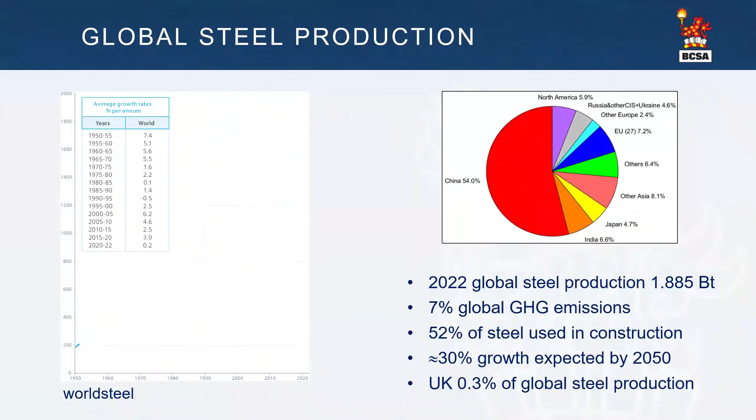Onto steel production then, and on the left is the trajectory of steel making globally since 1950, and you can see the almost exponential growth since about 2000, shown in the pie chart. That's mainly driven by China. In 2022, we were just under 2 billion tons total global production, and that represents something like 7 to 8% of global greenhouse gas emissions. Of all that steel, just over half goes into construction, so the sorts of products I showed you earlier.

And then the big question we're grappling with in the steel industry, in the context of decarbonisation, is where is growth going? We still expect, particularly driven by greater demand in developing economies, another 30% growth on that 2 billion tons by 2050. So we've got that double challenge. We need to decarbonize what we currently do, and we've got growing demand, particularly from developing economies. Just to put that 2 billion tonnes into context, in the UK, we only produce around 6 million tonnes per year at the moment, which is 0.3% of that global total.

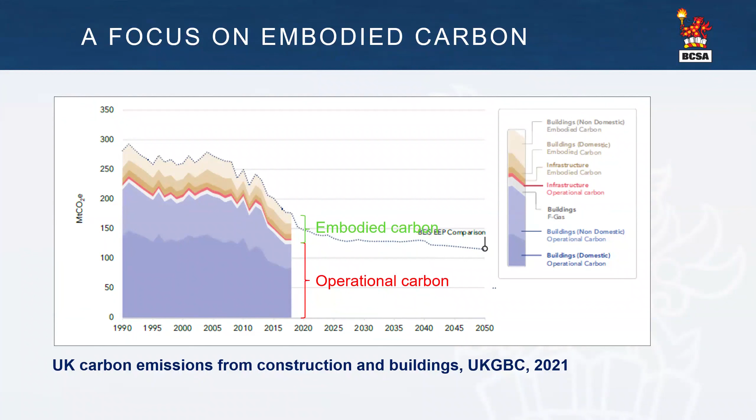I still think the focus should be more on operational carbon, because that is where the bigger gains are still to be achieved. Most of the reductions achieved so far have been mainly down to decarbonising the electricity grid, rather than anything fundamental in terms of the fabric of buildings. And because we've got a lot of older buildings in this country, we can't do too much with the fabric of those older buildings. So that remains a challenge, and I think really a focus on where we should be looking in terms of carbon reductions.

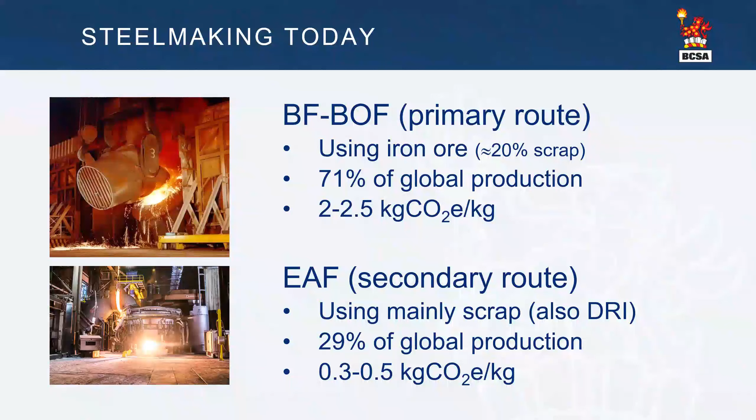In terms of the carbon emissions to make steel through that route, it's of the order of 2 to 2.5 kilograms of CO2 per kilogram of steel. The other route, which is the balance, so around 30%, today is mainly scrap-based. We're seeing more DRI, but I'm not going to cover that today. It's the secondary or scrap-based route. And as shown, the carbon emissions associated with this production route are much lower, 0.3 to 0.5 kilograms of CO2 per kilogram of steel.

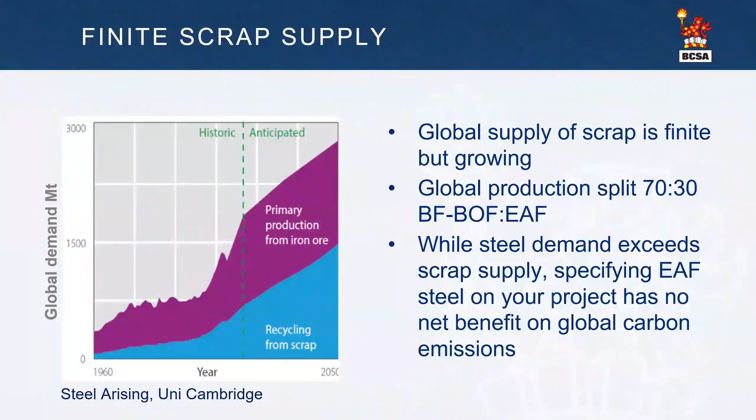Similarly with timber—of course timber is a low carbon material, and has some fantastic applications in construction. However, it's again a constrained supply. We don't have the land, certainly in Europe, to grow enough timber, and certainly not fast enough to substitute all the steel and concrete we use in our buildings. So again, it's a constrained supply.

But focusing back on steel, which is the main focus of today, this graph has again come from the University of Cambridge, and it shows global demand for steel. To the left of the dotted line is historic, and to the right is predicted or anticipated out until 2050. You can see the global supply of scrap, the blue shaded area, is finite—it is growing as economies develop and mature. But today, where that dotted line is, the production split is something like 70–30.

So the reality is, while steel demand exceeds scrap supply, specifying EAF on your project has no net benefit on carbon emissions. That's the central message I really want to hammer home—and maybe if you have clients, you wish to hammer it home too—because although people tend to understand the message, they tend to revert back to project level embodied carbon targets, which I'll talk about in a bit.

If we think about the different parts of that—the blue is largely EAF steelmaking from scrap, and as I've shown, it's already relatively low carbon, but we can do more. We can decarbonise the electricity we use to do that, and that's already happening with products like X-Carb from ArcelorMittal. But we also need to make sure we sort our scrap better, otherwise we're going to downgrade our scrap pool and limit the opportunities for what we can recycle it into.

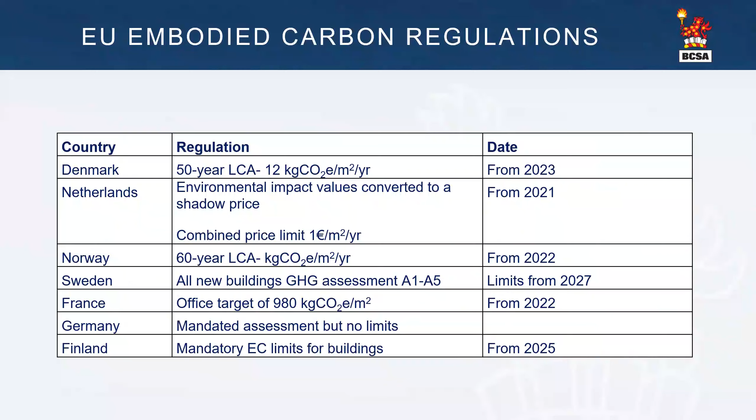In addition to that, we have whole building targets, but we also have the IStructE SCORS targets, which have tried to just focus in on the structure. I'll show you those in a minute. I would say the UK, despite being ahead of the pack over the last 20 years in terms of embodied carbon regulation, has slightly fallen behind other European countries.

This is just a snapshot of other European countries who have taken steps or are in the process of mandating and regulating embodied carbon. So it is happening in the rest of Europe, and I would think it's highly likely that at some point it'll happen in the UK. So these are the targets then.

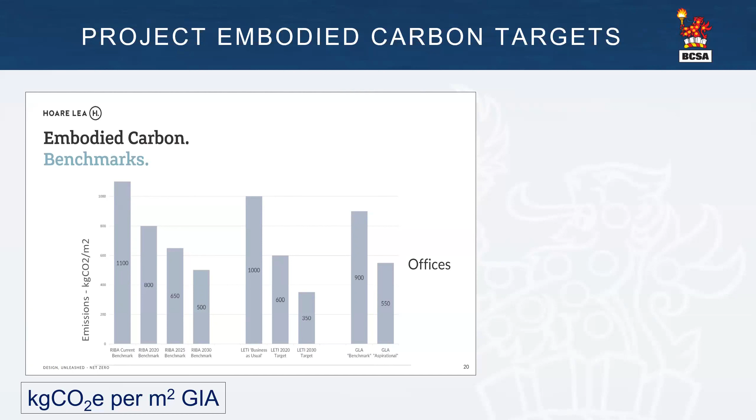I've mentioned RIBA, that's the block on the left, LETI in the middle, and GLA to the right. These are targets, or benchmarks really, for office buildings, and you can see they ramp up as we get towards 2030. At the moment we're looking at something like between 350 and 550 kilograms of CO2 per meter squared of floor area. That's for new build.

And I mentioned the IStructE SCORS one. This is structure specific, so they've taken out the rest of the building, just honing in on the sub and superstructure. These are slightly tougher - they're actually based on the LETI whole building embodied carbon targets, but structure only. If we look at 2030, the target is something of the order of 150 kilograms of CO2 per meter squared just for the substructure and superstructure. So that's starting to get quite challenging for all structural forms.

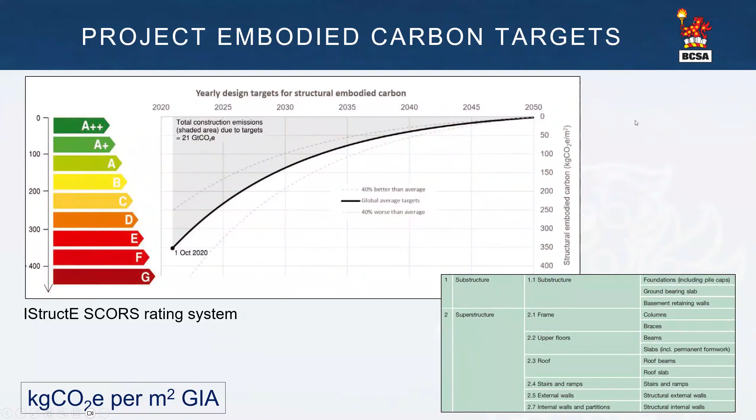And as we get to 2050, it gets significantly more challenging.

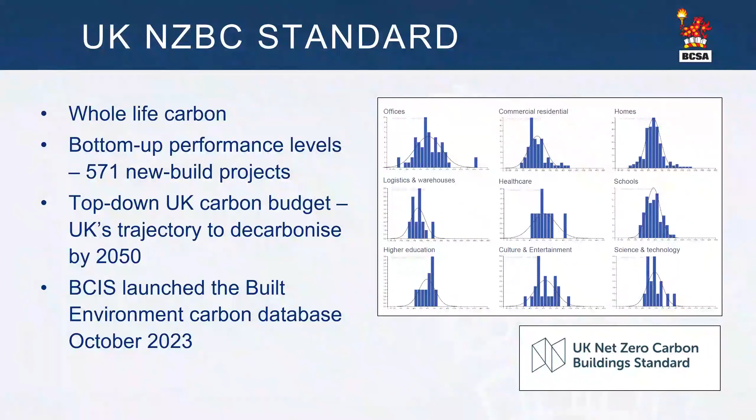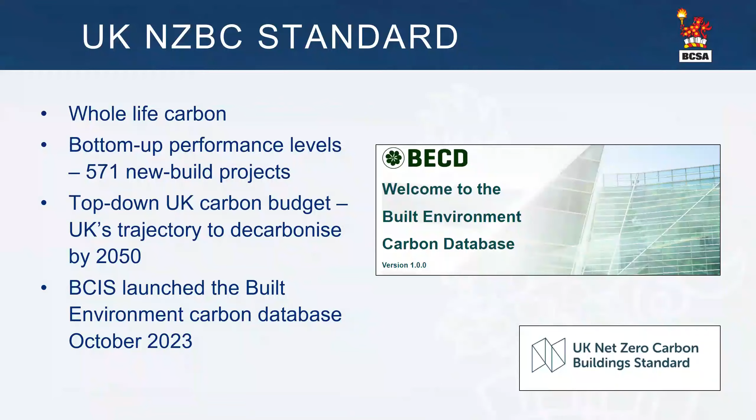One other initiative that is nearly ready and is likely to supersede all the voluntary targets is this net zero carbon buildings standard. It's been in development for a couple of years now. It's linked to this built environment carbon database, where you can find a lot of data on the embodied carbon of a number of buildings.

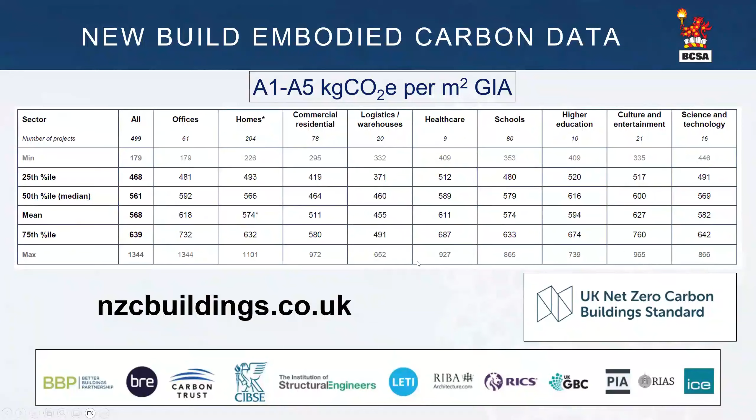I literally just received the drafts of the standard a couple of days ago, and the new targets will be issued in about a week's time. So they're going to be very important, because what I'm showing on the screen here is bottom up, but the top down targets are coming from the UK carbon budget and where we need to be by 2050, so likely to be significantly lower than the mean values showing on the slide here.

A different approach to specifying, and this is something BCSA are supportive of. It's not our suggestion - it's been proposed and supported by several organisations, including Responsible Steel, Steel Zero, CRU, and ArcelorMittal support it. Very quickly, what this graph shows is that on the x-axis is the recycled content in steelmaking, and the y-axis is the carbon intensity of making crude steel - not the finished product, but making the crude steel.

Every dot on there is a steel mill from around the world. So you can see the grouping to the left is all the blast furnace mills, the integrated primary steelmaking works, and the group to the right is all the EAF near 100% scrap-based mills. This approach is more cognizant of the fact that it reflects that all steelmakers need to decarbonise.

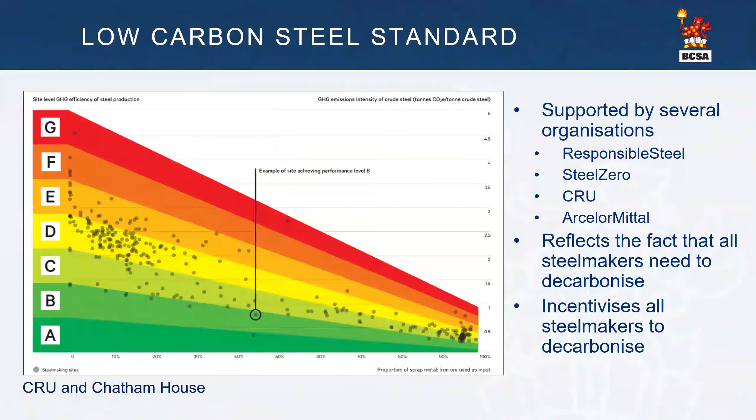As I've explained with the global context of this, there's no point just specifying EAF steel - it doesn't solve the problem. We have to decarbonise these mills on the left of the figure, and this approach incentivises all steel makers to decarbonise. It's being picked up by Steel Zero, if any of you are Steel Zero members or thinking of that. Steel Zero is for users of steel and is intended to send a message to steel makers to decarbonise through procurement.

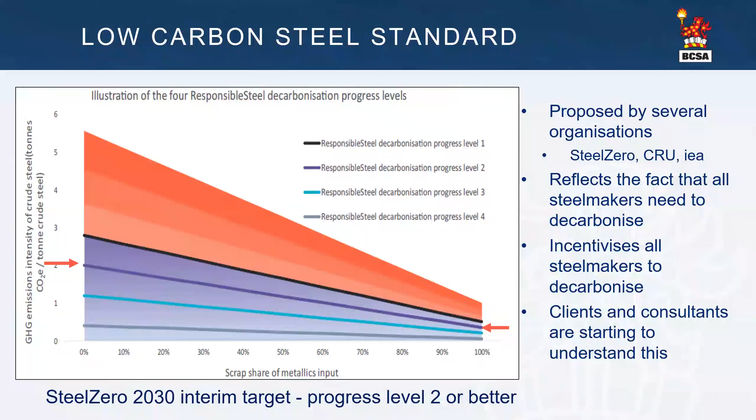Steel Zero propose this performance level 2. These are the responsible steel progress levels, so anything better than level 2 is what Steel Zero wish to do. This is their recently published 2030 commitment. So if you sign up to them, you commit that by 2030 you will procure a proportion of steel in that blue triangle.

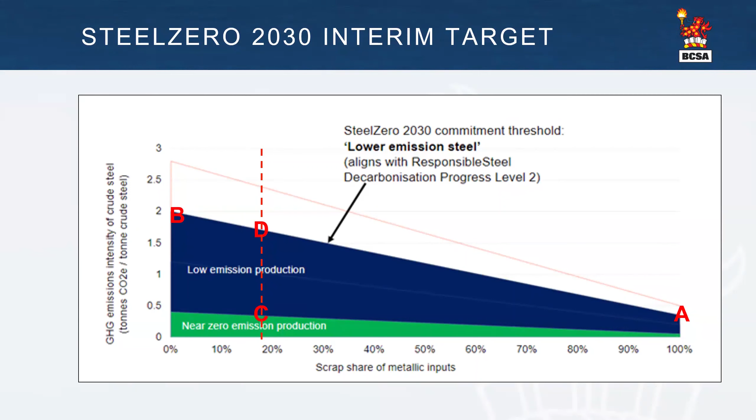We're supportive of this because instead of incentivizing specifying steel from A as opposed to B, it incentivizes specifying steel from C as opposed to D. So the intention here is that we're taking out the recycled content aspect of this, and we're incentivizing steel makers on the same vertical dotted line in this case. We're moving away from A to B, and we're incentivizing specifying C over D.

Despite this global view, we're cognizant that clients and some consultants are still very keen to adopt embodied carbon targets at the project level. And if clients insist on that, we would recommend using a blended approach - I'll explain that in a minute. That would involve using a mix of BOS and EAF, and even some reused steel if appropriate.

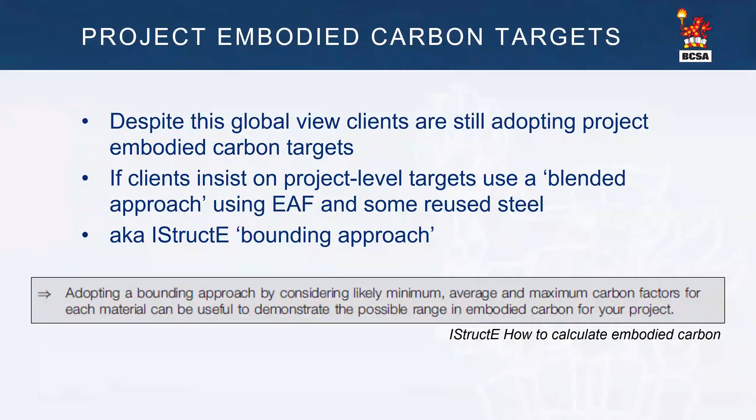That's what we call this blended approach. The IStructE use a similar term - they call it a bounding approach. I've just taken a snippet out of the IStructE guidance there. So they support and recommend that you use this bounding approach to meet embodied carbon targets, should you choose a project level embodied carbon target.

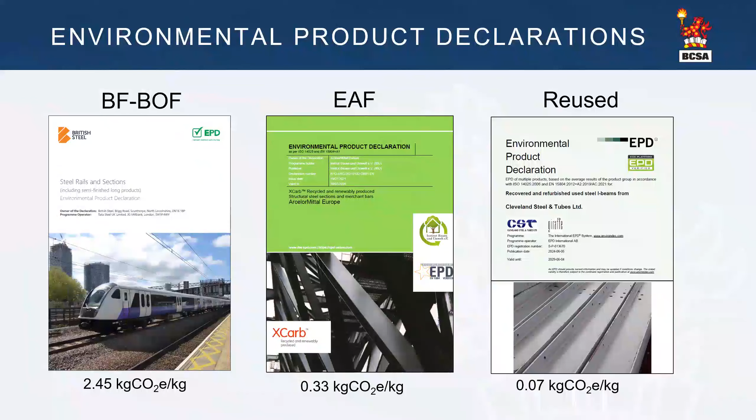So if, and I emphasize if, you're going to be working to an embodied carbon target at the project level, we do have the constituent parts here that you can choose to achieve that target using a blended approach.

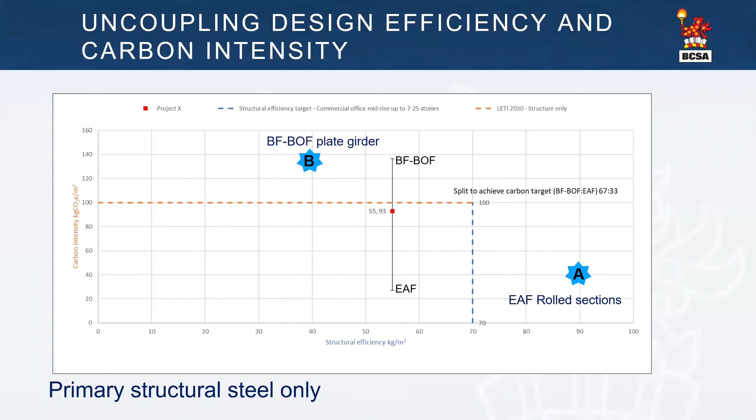Just to go back to this, the A and B here is hypothetical, but it is in reality happening. For example, and again these are theoretical and relatively extreme, but real, A could be EAF rolled sections, and B could be a very structurally efficient plate girder. We're already seeing the mothballing of plate girder lines in the UK purely because of the embodied carbon arguments, whereas in terms of structural efficiency they're actually a very good solution on some projects.

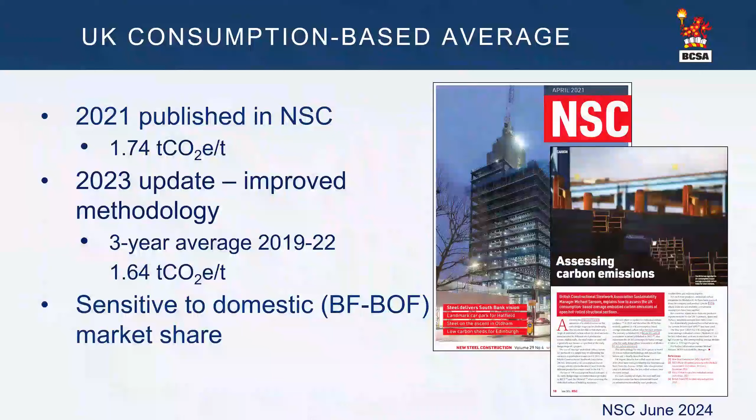In reality, the actual values that fall out of those recommendations are not too different. Just to show you, this is the latest value we've calculated at BCSA, published in 2021: the market average mix in the UK for structural sections in 2021 was 1.74. We've updated it last year, published in the NSC last month, and you can see we've dropped a little, to 1.64, that's a 3-year average. It's very sensitive to domestic market share, the British Steel primary steelmaking market share, but that is the value we're recommending using now. The IStructE are updating their guide this year, and hopefully they'll include that 1.64 value in there.

Just to really finish up this part, I want to show you a little example of what these numbers mean. This is a building we've used in the steel industry for several years now to do these sorts of comparisons. It's an 8-story office building.

In terms of facade, it's a bit outdated now, but structurally it's fine. It's 16,500 meters squared floor area, relatively long grids, arguably for today, 60 minutes fire resistance.

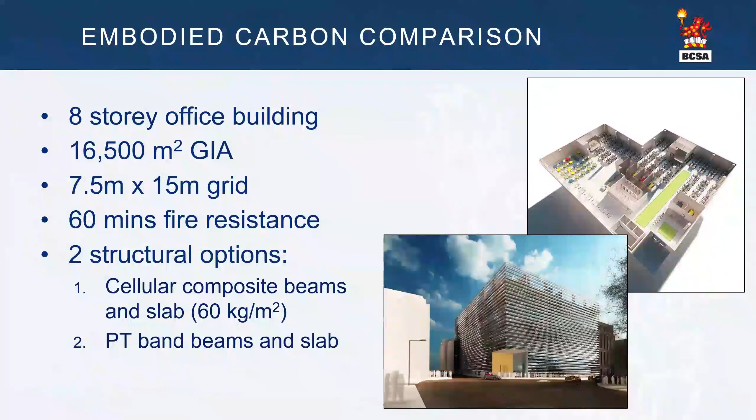For this building, which was designed by Peter Brett Associates, we're focusing on 2 structural options: a cellular composite beams and concrete floor slab, steel, with a primary steel weight of 60 kilograms per meter squared, and we compare that with a post-tension band beam and slab option.

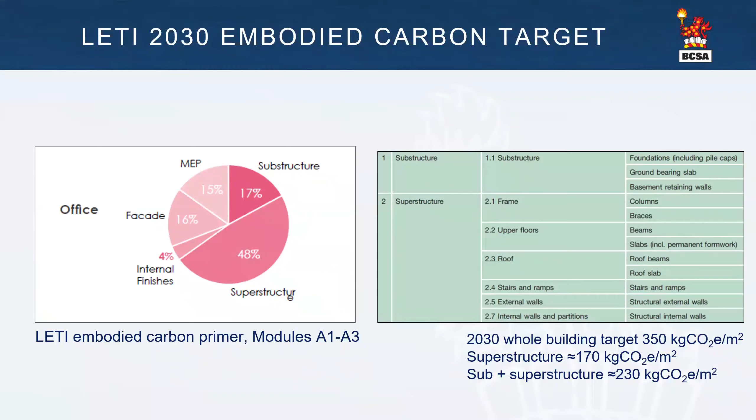So it depends on which interpretation - it isn't this granular on the LETI targets - but these are the sorts of figures, and we've spoken to a lot of structural engineers. These are the sorts of figures that are currently being worked to.

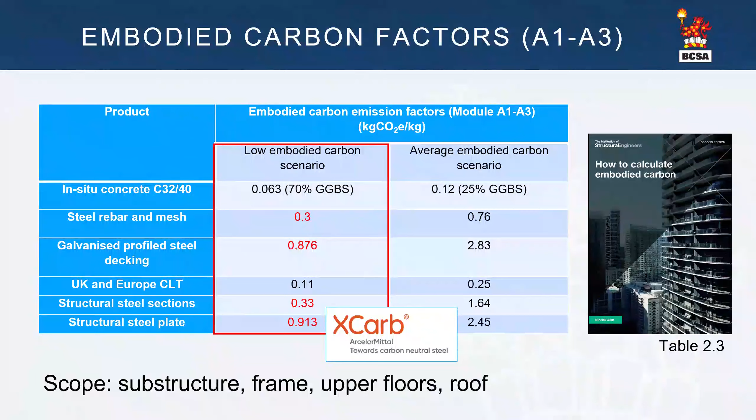And then we've also really ratcheted it up to say, well, how far could we go if you were really going, pushing every sort of low carbon button? Again, we've used the IStructE guidance there, but for the red ones shown here, we've used the XCarb figures - for the rebar, the steel decking, and the sections and the plate.

Using those values, this is what we come up with. On the left-hand side, you've got the steel variant: the blue is using the average embodied carbon scenario, and the grey is what we could do if we absolutely cranked it up using the values in the box here. The right-hand side is comparing that with the post-tensioned option and doing exactly the same - putting in more GGBS in the concrete and using low carbon rebar, etc.

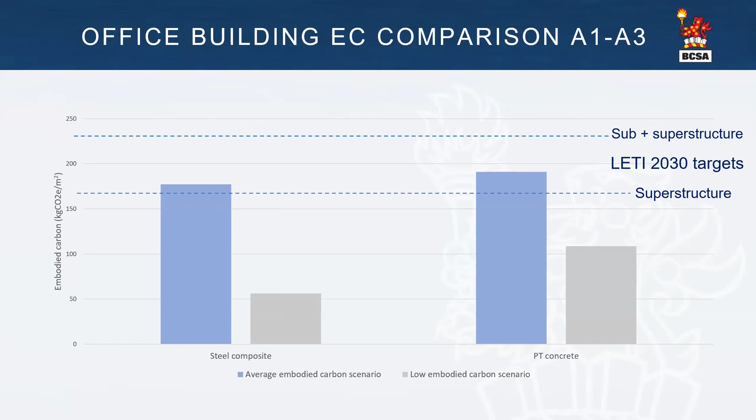So you can see, we're not a million miles away today, but we are able to meet - I should say this is both the sub and the superstructure - so we're well beneath the sub and superstructure target, and just showing you where we can go, even with products available in the market today, particularly using the XCarb variants. We could get down to somewhere near 50 kilograms per meter squared for the superstructure.

Just to finish up then, conscious of time, I just was going to run through stuff that BCSA and the sector is doing. We're doing lots of stuff, of course, and the environment keeps changing.

But we really, I guess, in terms of carbon at least, we hang our strategy all around this, which we launched in 2021. We launched with the minister at the time, Lee Rowley, and this is really centered on this waterfall, and we look at sort of 3 main blocks within this waterfall. So this is where we were at 1990, which is the benchmark for UK government 2050 net zero target legislation, where we got to in 2021, and then the things we think we can or should do to get to near zero in 2050.

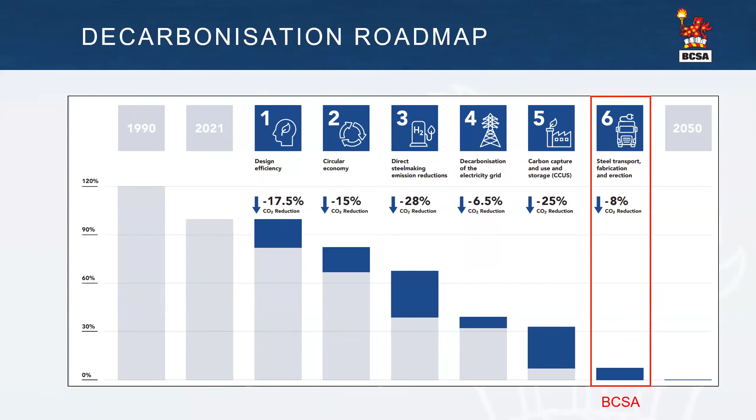And we look at the first 2 levers - we call these levers in our strategy. We have demand side levers, we have supply side levers. So this is the steel making, and then the little bit on the end is really the BCSA, the Steelwork contractor members' contribution to that.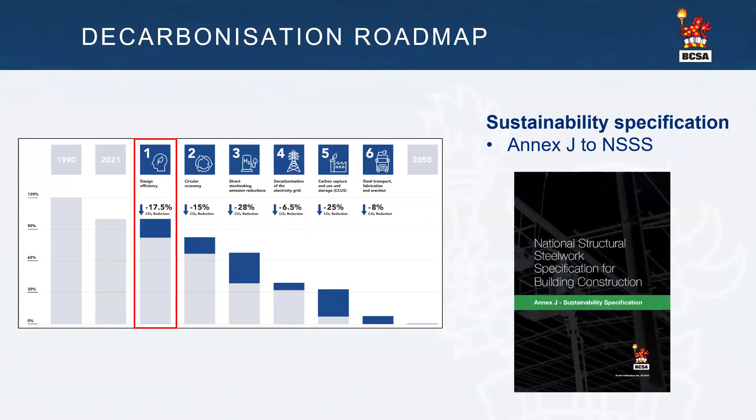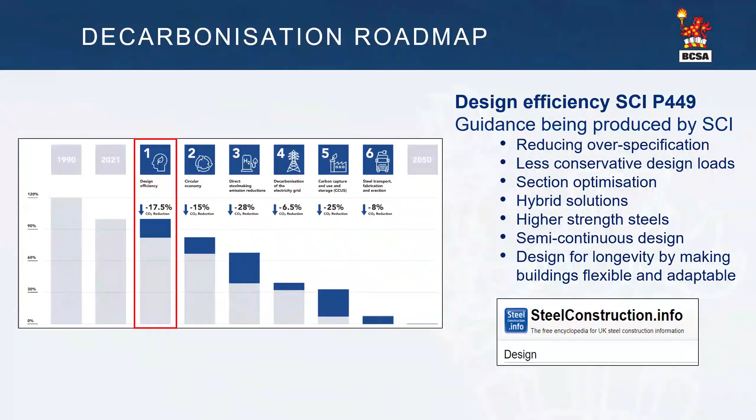Very quickly, things we're doing - and this isn't a comprehensive listing - but in terms of design efficiency, we have a sustainability annex, Annex J, to our NSSS, which deals with sustainability aspects. We've been working on this for some time with SCI. We're about to produce a new guide, SCI guide P449, and that is all dealing with how we can improve design efficiency to achieve carbon savings, and those are the sorts of things this guide will cover.

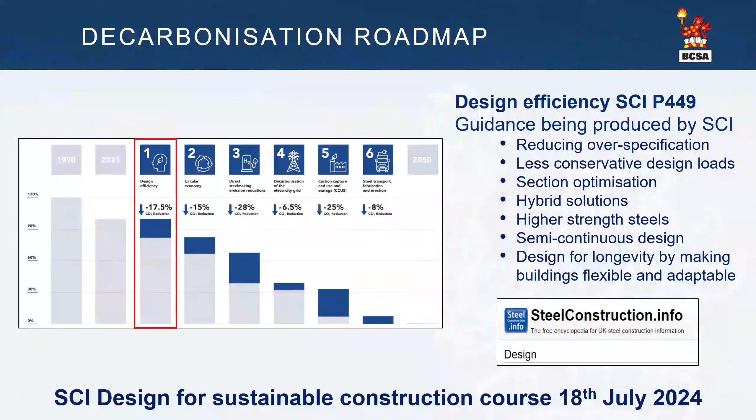And just really to flag that SCI is running a design course on this new publication in a couple of weeks' time.

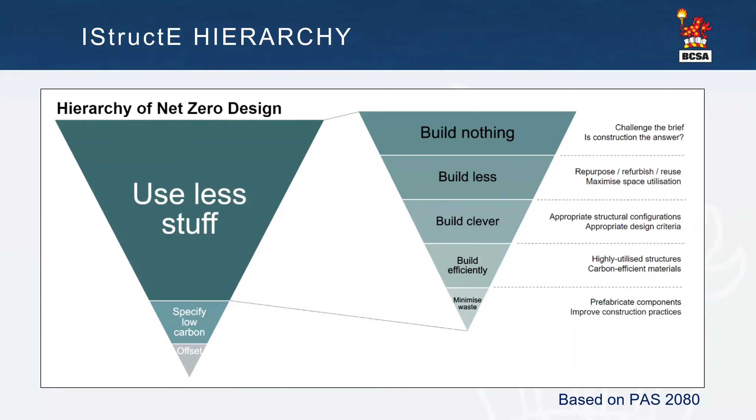And we predicate that on this, which again we've borrowed from IStructE. So this is their hierarchy. So that SCI design guidance is all about focusing in on where, as designers, you can make a difference. So following that hierarchy, and really only once you've done all that, think about specifying low carbon. So this is kind of the approach we're adopting, and the SCI guide has adopted.

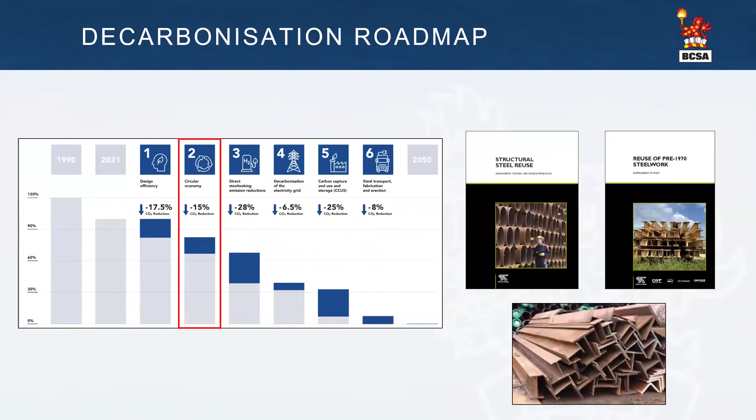Moving on then, circular economy means lots of things. It means things in terms of steelmaking, but particularly in our sphere, we are particularly interested in and doing a lot of work on steel reuse. BCSA has set up a steel reuse working group. There's obviously lots going on in this space, particularly in city centres and particularly in London. And there's a raft of stuff coming out, again, largely SCI.

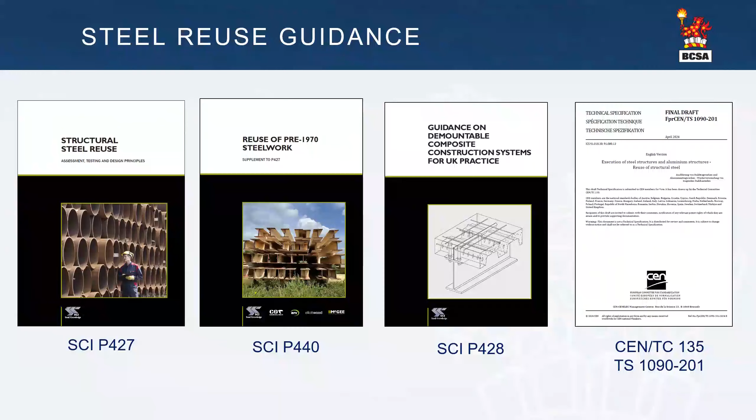So we've got the two on the left-hand side are design guidance to reuse existing steelwork. P428 is all about designing for the future. This is particularly demountable composite flooring systems. And then on the right-hand side, CEN is in a sense following what we did in P427, and there's a new technical specification being developed under CEN Technical Committee 135, which is out for formal vote. So a load of stuff in the reuse space, and I think we're going to see a lot more of that.

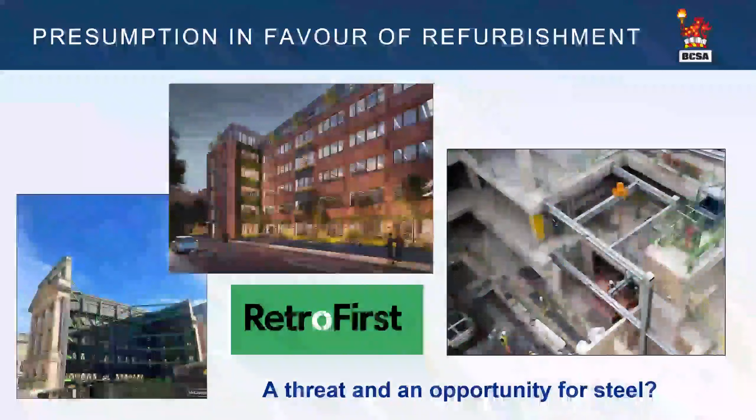The whole presumption in favour of refurb and the retrofit first movement, I think, is both a threat and an opportunity for steel. Obviously, it's going to mean less new build, but in most of these buildings that are being refurbed and retrofitted, there's some fantastic opportunities for steel, and we've seen some great projects coming out, again, particularly in London, of what steel can do to refurb and extend the life of existing buildings. So more and more of that, I think, is coming.

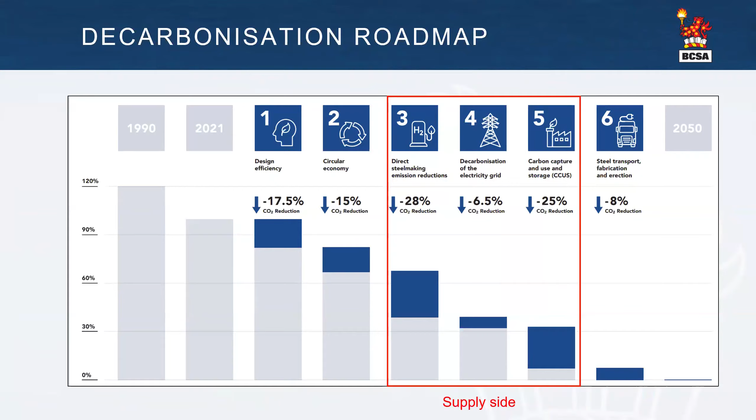The more important bit, arguably, so the biggest slugs of the waterfall here are all to do with the supply side, and by that we mean steelmaking, and we're looking really in three areas: direct steelmaking emissions, grid decarbonisation, and that's obviously linked to the transition to EAF, which you're probably aware of, but is also affected by the high UK energy price. Industry still pays something 50–60% more than, for example, in France and Germany.

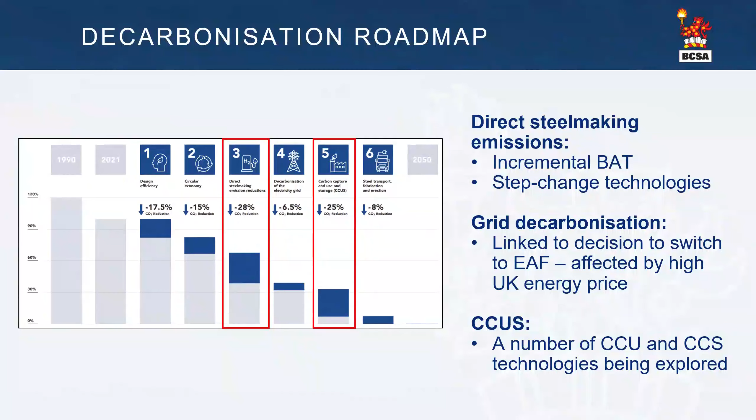And the last one on here is carbon capture, use and storage, lever 5. Work is underway, but still some way out, I think. In a sense, in the UK, if we transition to EAF, the argument for CCUS goes away, in the UK anyway. So most of the reductions under levers 3, 4, and 5 will be through the transition from BOS to EAF and achieving those lever reductions 3 and 4.

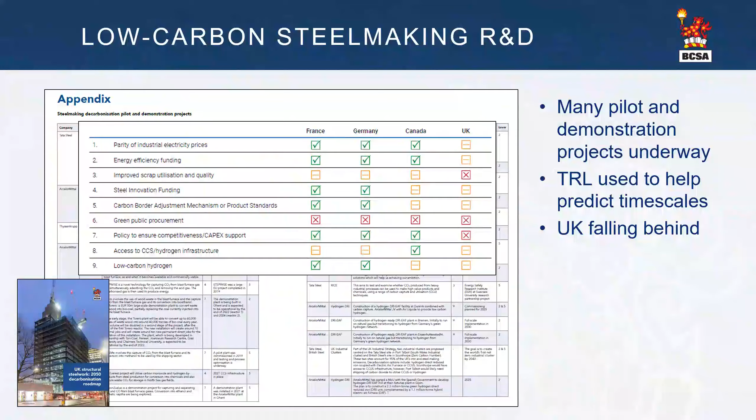There is loads going on at the back of the roadmap. There was a comprehensive listing of stuff going on in terms of new technologies and R&D and new pilot studies. Fair to say that the UK is falling somewhat behind, particularly our European neighbours, in terms of some of the advanced technologies like hydrogen, DRI, etc. But of course, we are in the transition stage, from BOS to EAF, which is a major step for the UK.

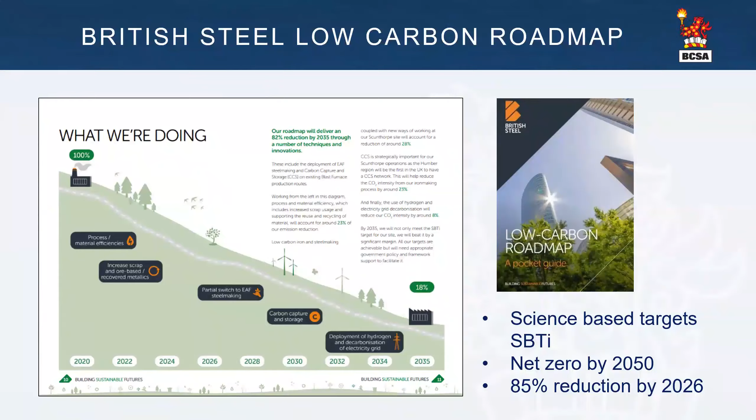So on that, then, in terms of the three main suppliers to the UK market, just really a couple of slides on each of those. British Steel has committed to science-based targets. Of course, they're aligned with the 2050 net zero carbon target, and they do look to achieve an 85% reduction by 2026, which seems quite staggering, but fingers crossed they do that. And of course, that's in connection with transitioning from blast furnace steelmaking to electric arc.

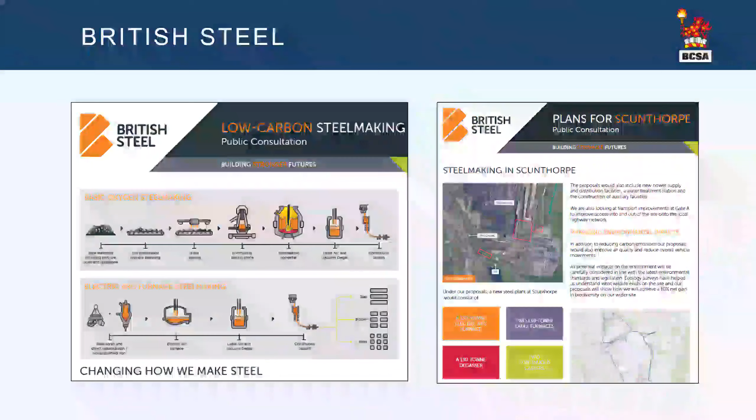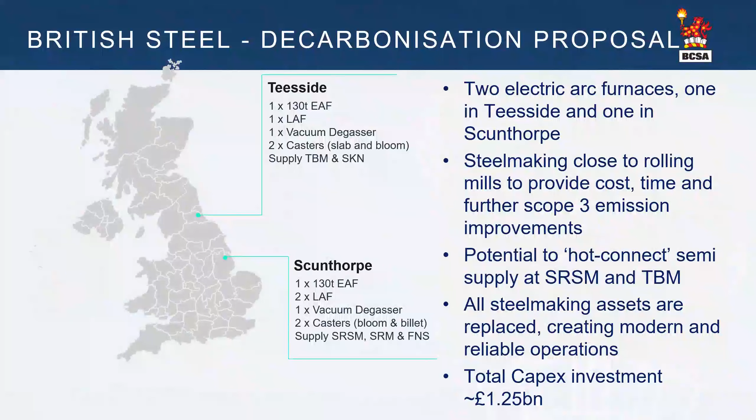And this is just the plans for Scunthorpe. The EAF proposals are to have a new EAF mill at Scunthorpe and at Teesside, and planning permission for both has been granted. Negotiations with government are still underway to secure the funding, and that's been somewhat held up by the change of government. But these are the plans. So Teesside and Scunthorpe to have a new 130-ton EAF mill, and there's significant benefits to that in terms of process. And just to note at the bottom, this is the sort of capex investment which is being looked for, and hopefully with a new government we can get that secured and get these EAFs installed.

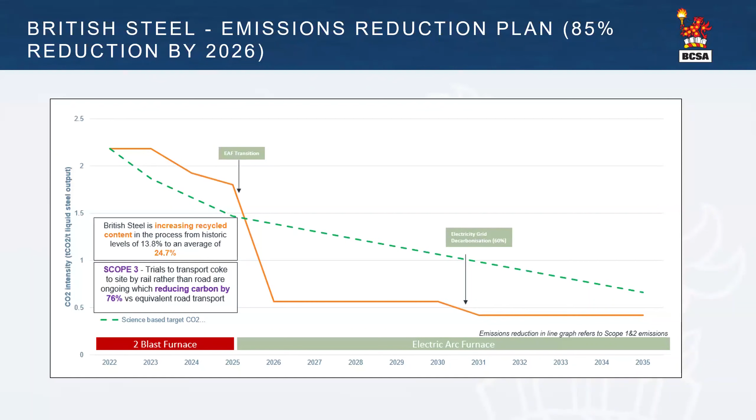In terms of Arcelor, slightly different situation. Their commitments are slightly more modest in the short term, since they already are a large EAF producer, certainly in Europe.

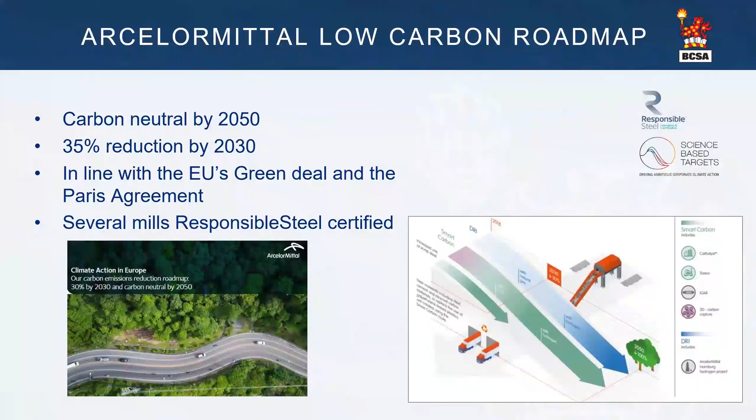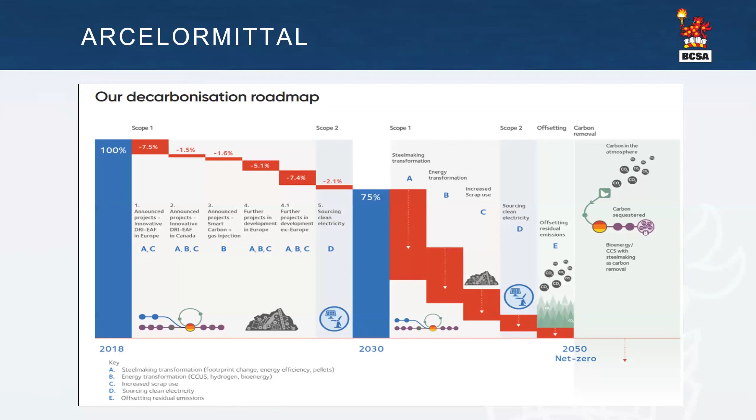So they haven't got that step change technology, but they are doing some really interesting work in a number of the key areas that I've touched on, like CCUS and hydrogen and bioenergy, all these things. So their trajectory is somewhat smoother, shall we say, to 2030, after which there's some significant drops, particularly in terms of the DRI hydrogen side of things.

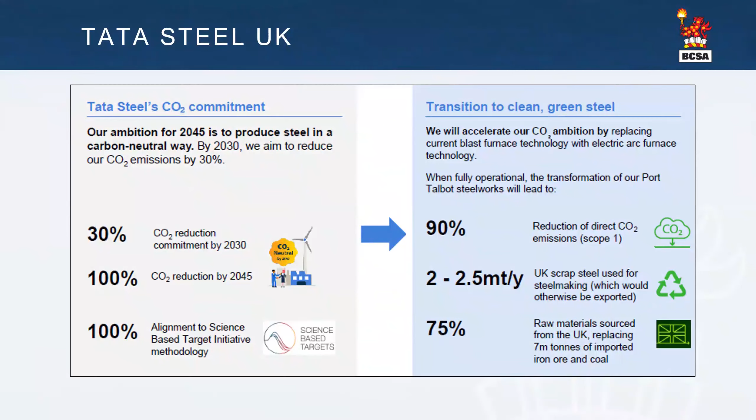And lastly, for Tata, it's a very similar situation to British Steel. So here are their commitments, and similar sort of commitment. Of course, they're mainly a flat product producer, so they will probably be looking at something like 75% scrap, so they'll still need some primary iron ore iron units in their works, but their product offering, as we've been told, will be the same, and their transition is slightly further out, but similarly sharp.

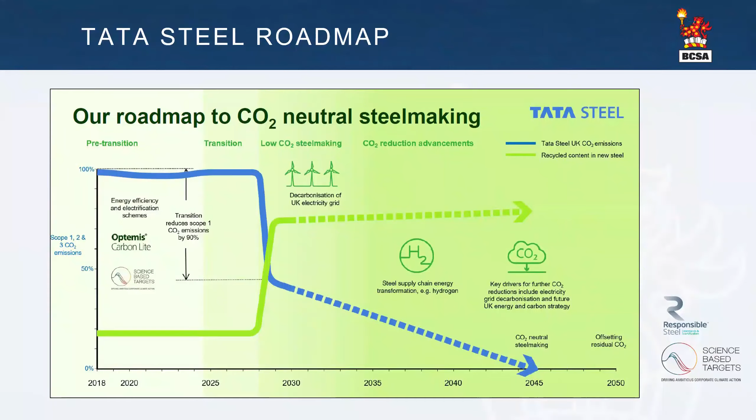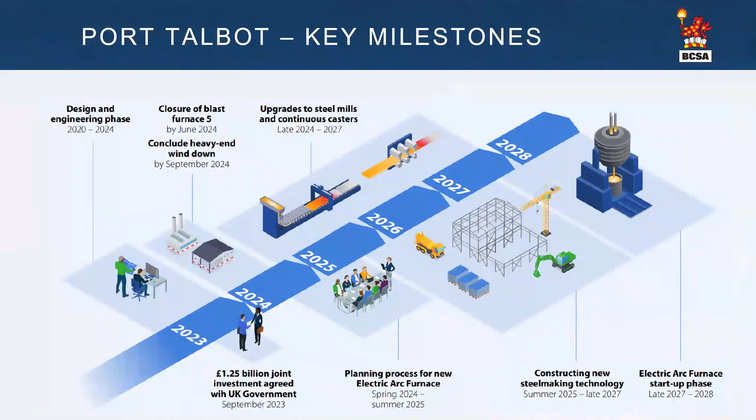So you can see, as you've probably seen in the press, already switching off the blast furnaces, but the transition will be when they get their EAF up and running at Port Talbot, and this is what their timeline kind of looks like, hopefully going forward. So slightly further out than British Steel, but Tata Steel is slightly more advanced with government negotiations. So we'll see who gets there first.

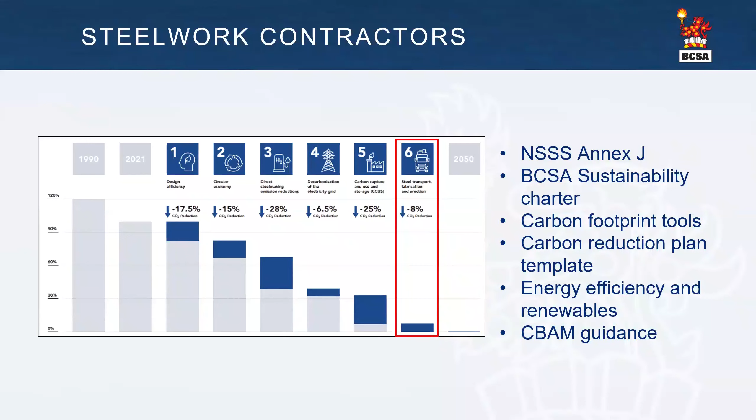And the last little bit, and this is the end for me, is lever 6, which is relatively small, but it's the additional impact that steelwork contractors add to the carbon footprint, if you like, of the whole supply chain, and stuff we've been doing. I've mentioned the Annex J and the NSSS. We run a sustainability charter that most of our members are signed up to. We've developed in-house carbon footprint tools, and many of them are on with doing embodied energy efficiency and renewable work. And we're focusing on the CBAM and the implications that that will bring to the sector.

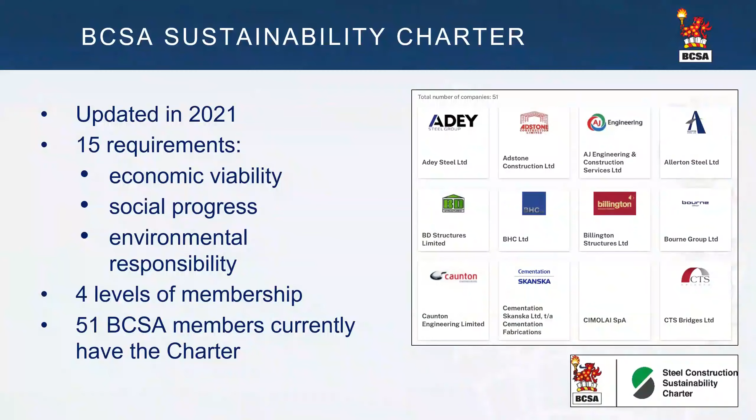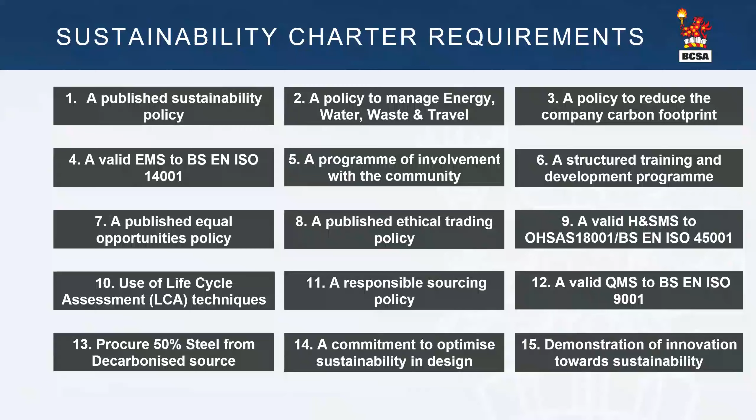Only picking on just one of those, this is the charter. So I've said we've updated it after I joined BCSA. It's a bit tougher now, but I think that's the right thing to do. So 51 of our members currently have the charter. We don't just cover carbon, we cover the full breadth of sustainability. So there are 15 requirements. So to meet it at gold level, you've got to achieve all these sorts of things. So it's a real positive, much broader than just carbon, but includes carbon, showing that our members are sort of doing their bit in terms of sustainability and carbon. And just to show you some examples there.

So that was it. I'm just very quickly summarizing, if I may. Think about the wider implications of project level embodied carbon targets. Supply constraints, global supply of steel and GGBS and concrete and timber are all important, and you need to bear these things in mind. You know, we simply can't substitute all the steel and concrete we use just by using timber. There's just not enough of it, so you need to bear those things in mind in the decisions you make at a project level.

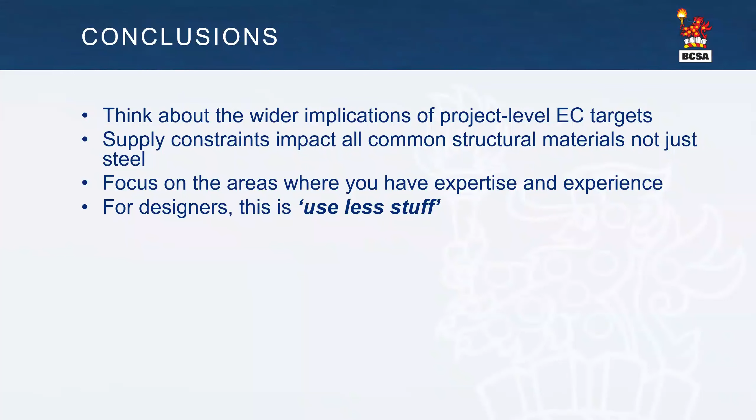I would advocate focus on areas where you have the expertise and experience, and for designers, that's all about designing better and using less stuff. I think that's Will Arnold's phrase, not mine, but that's where we would encourage them, and hence the SCI design guide that's about to be published. We would promote early engagement with supply chains, particularly our steelwork contractor members. They've got the experience. If you're thinking of reuse, that early engagement is very important.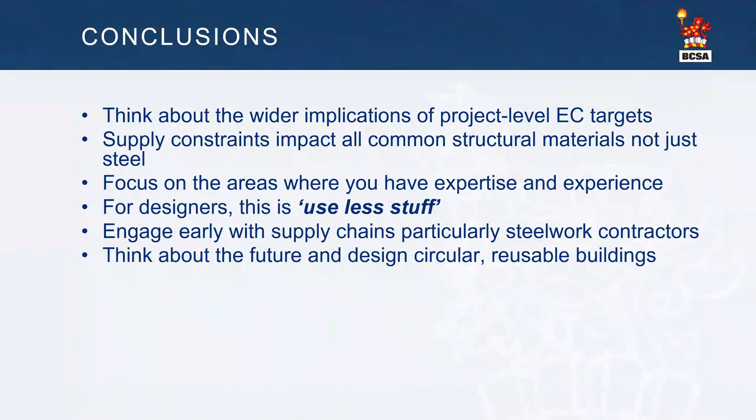And also, okay, we're thinking about the here and now, and clearly we have an urgency to address the climate challenge, but we also need to think about the future and do what you can to design for circular reusable buildings, and that's an easy win for steel construction.

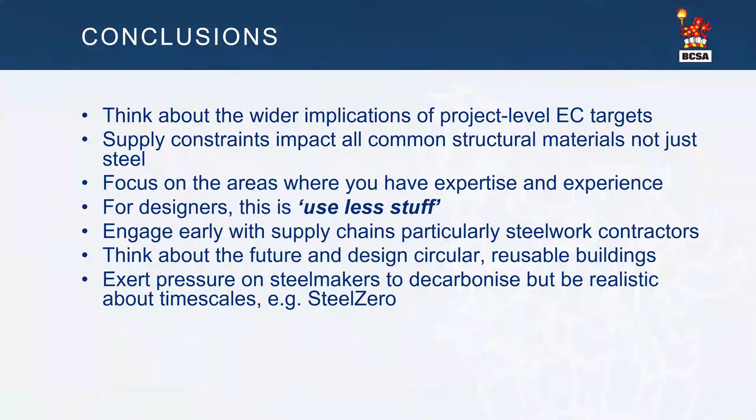Encourage you to exert pressures on steelmakers to decarbonise, so initiatives like SteelZero, which I know several BCSA members have signed up to, but please be realistic about timescales. You know, we can't have zero carbon buildings tomorrow. This is a massive change for the steel industry to transition to, in the first instance, to EAF, and then to move on to DRI and hydrogen and other technologies. It will take time, it will take a lot of money, so please be mindful of that.

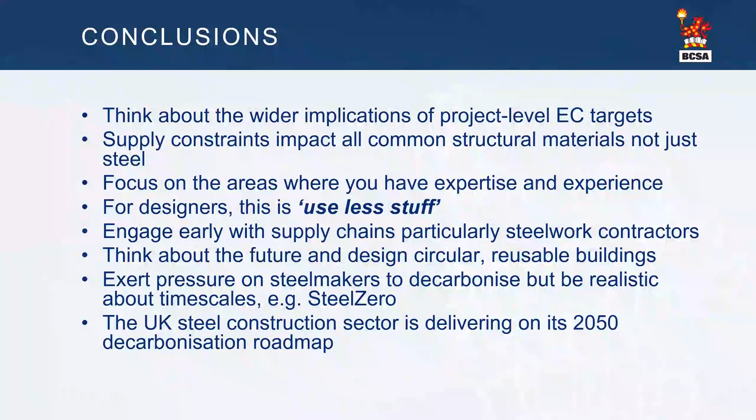And finally, hopefully, as I've shown you, we have a plan as a sector. BCSA is sort of leading on this, and our roadmap, we're delivering it, and we will be reporting on it in the next couple of years to show how far we've got from when we published it in 2021.